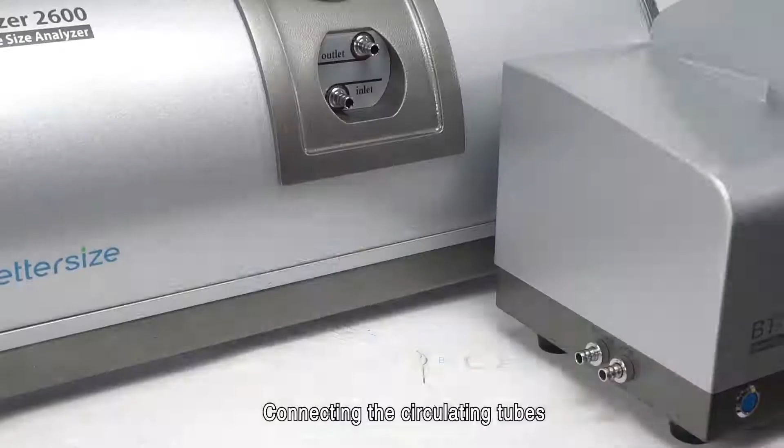Connecting the circulating tubes. Take two circulating tubes, one connects from the water inlet port on the front of the instrument to the water outlet port on the left side of the BT802. The other tube connects from the water outlet port on the front of the instrument to the return water port on the left side of the BT802. Both tubes must be connected firmly.

Connecting the inlet and outlet tubes. Take a big drain tube and insert one end to the drain port on the right side of the BT802. Cut appropriate length, and place the other end in an empty bucket. The recommended length is that the tube end is right above the bucket.

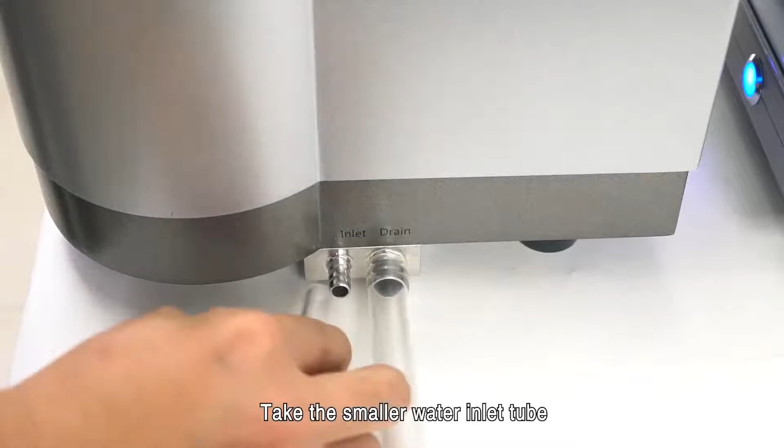Take the smaller water inlet tube. Insert one end to the water inlet on the right side of the BT802. Cut appropriate length. Insert the anti-blocking nozzle on the other end, and place it in a bucket with water inside. The appropriate length of the water inlet tube is about 5 cm from the bottom of the bucket.

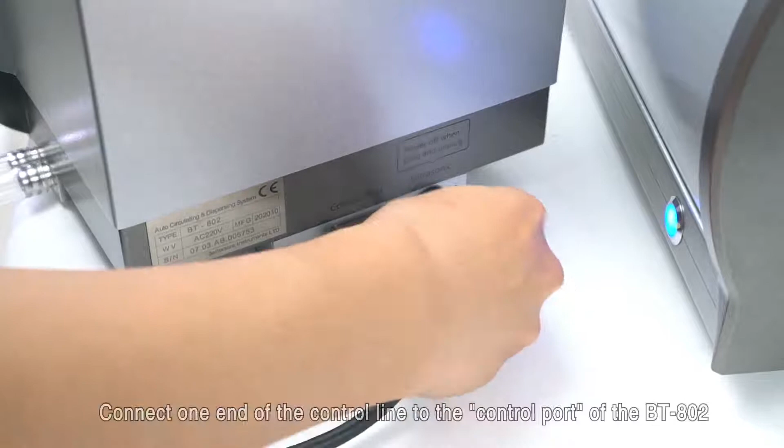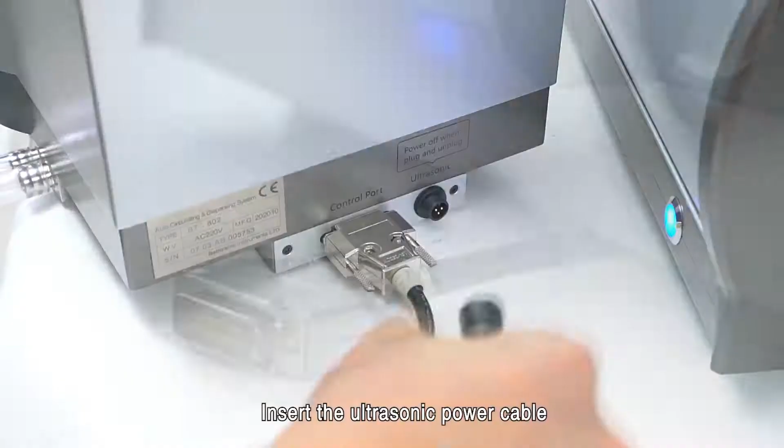Connecting the circulating system control line and power cable. Connect one end of the control line to the control port of the BT802. Tighten the screw and pass the other end from the bottom of the main device to the back side. Insert the ultrasonic power cable into the ultrasonic power port on the back of the BT802, and place the BT802 on the right front of the main device.

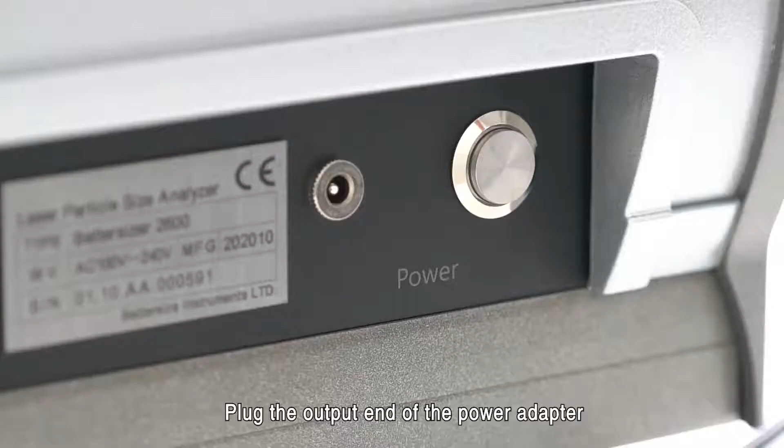Connecting cables. Connect the control line passing through the bottom of the main device, and tighten the screws. Plug the output end of the power adapter into the power connector of the main device. Plug one end of the USB cable into the signal port. Plug the other end into the USB port of the computer. Connect the adapter power cable.

Plug the power cable of the instrument and BT802 into the power socket, and turn on the power. Power on. Press on the power switch to turn on the particle size analyzer, and press on power switches to turn on the computer and the monitor.

Installing operating software. First insert the USB flash drive into the USB port of the computer. Then open the USB flash drive by double-clicking it. Open the folder Bettersizer Laser Particle Analyzer System. Double-click Setup.exe to start the installation, and follow the instructions to finish the installation of the software.

Installing the USB driver. Right-click Computer, select Manage, and then Device Manager to find STM32 Virtual COM port. Right-click Update Driver. Select Browse My Computer for drivers. Then head back to the USB flash drive, and select the file named High-Speed Driver 1.1, and click OK to complete the installation of the driver.

Testing and viewing system status. Checking the hardware function of the instrument. Start the software, and click the Supply, Drainage, Rotating Speed, U-sonic, R Speed plus and R Speed minus buttons to check whether they are working properly.

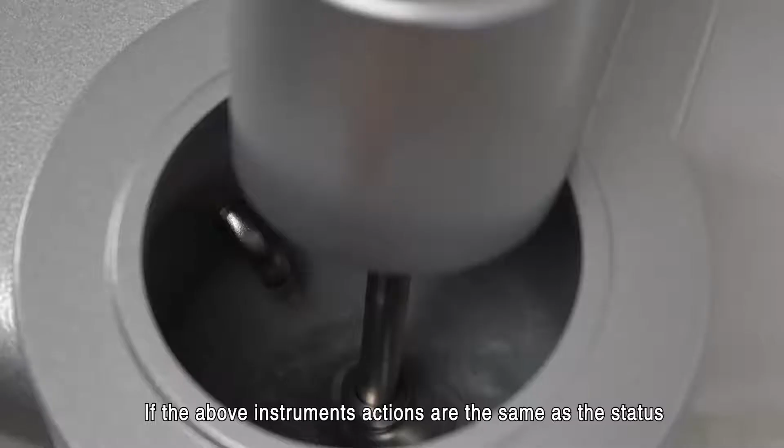If the above instrument's actions are the same as the status shown in the video, it means that the hardware system of the instrument works as normal. Follow the process for other dispersion units.

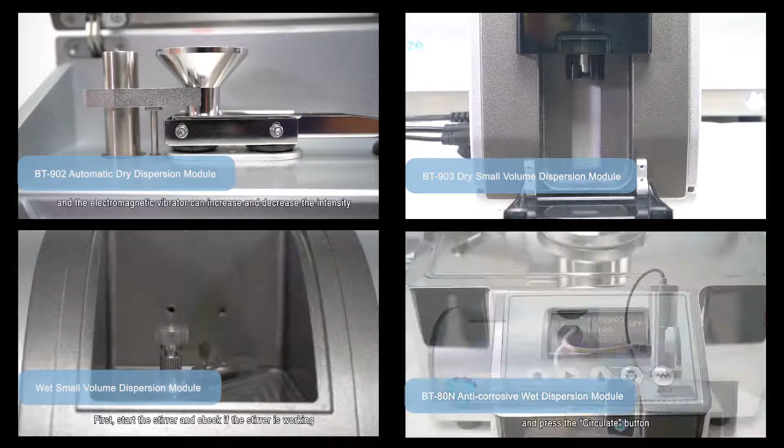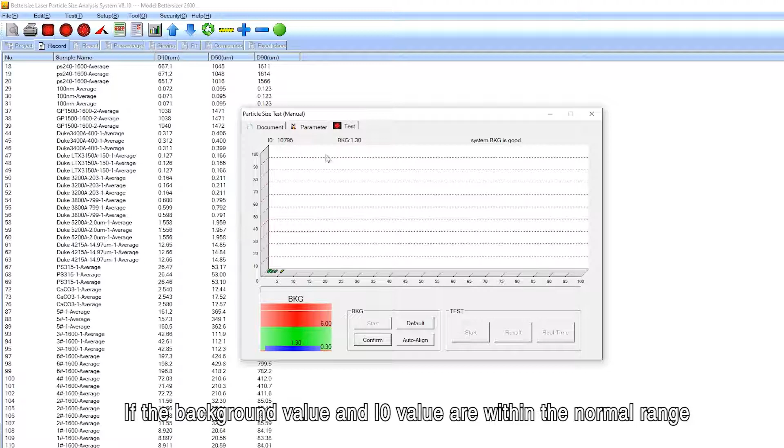The I0 value is usually between 10,000 to 30,000. If the background value and I0 value are within the normal range, it indicates that the instrument is in good condition. Routine test steps. Select or create a new project.

Click the Particle Size Test Manual button. Fill in each blank in the document pop-up window, and click Parameter to set relevant parameters. Click Test again to enter the test window. Click the Supply icon to supply water.

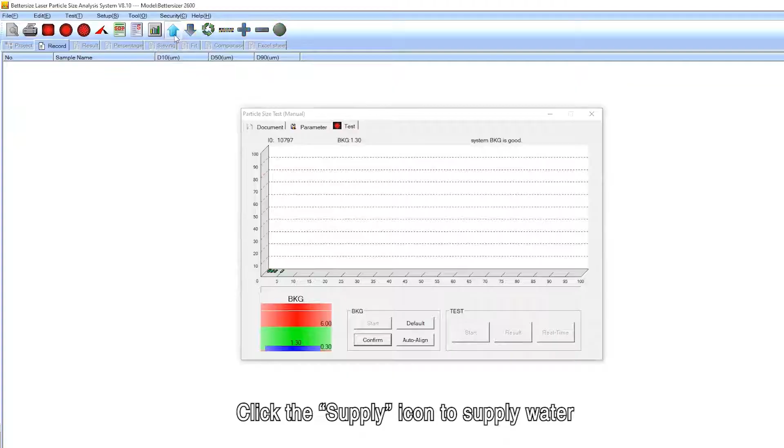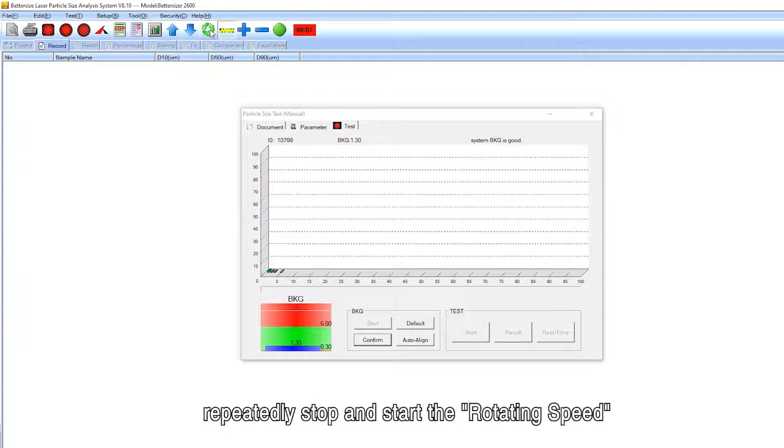Add dispersant, and then click the rotating speed and ultrasonic icons to remove air bubbles. The bubble removing method is: repeatedly stop and start the rotating speed, each time interval of 2 to 3 seconds. Repeat 2 to 3 times. And click the confirm button to test the background.

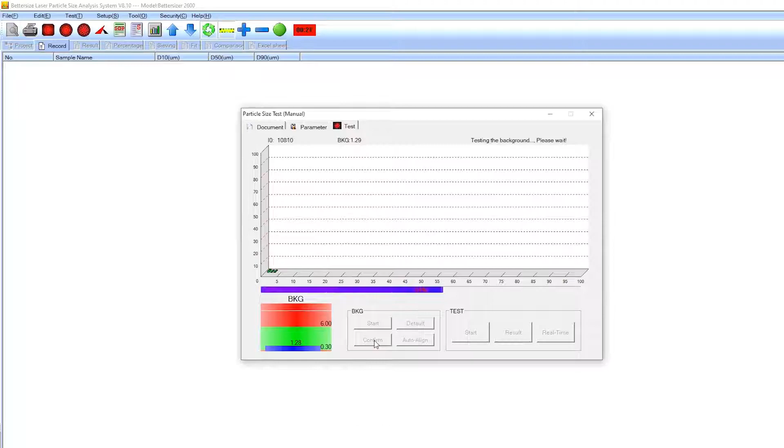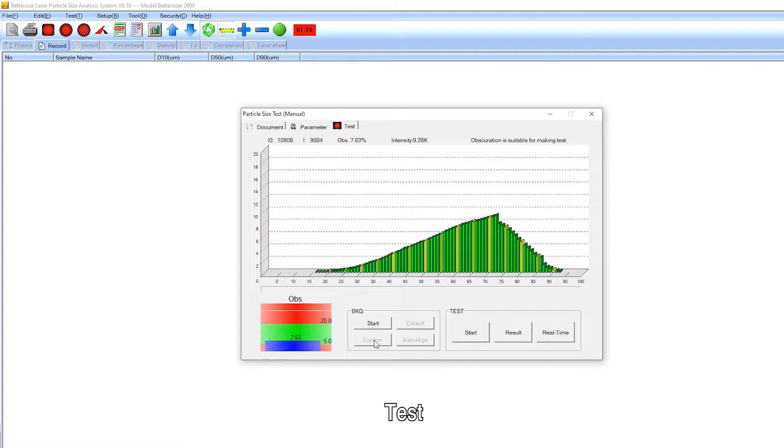Sampling and adding samples. Mix samples well. Add a small amount each time, and add multiple times. Stop adding samples until the obscuration OBS is between 10% to 15%. Test. The dispersion time is 1 to 3 minutes for general sample.

During the dispersion, you can click the real-time button in the test area to see whether the test results are stable. If the test results are unstable, continue the dispersion until the results become stable. Then the test data is valid.

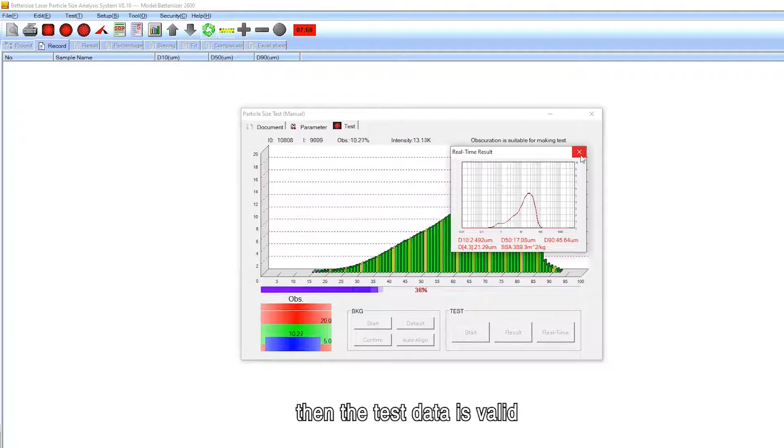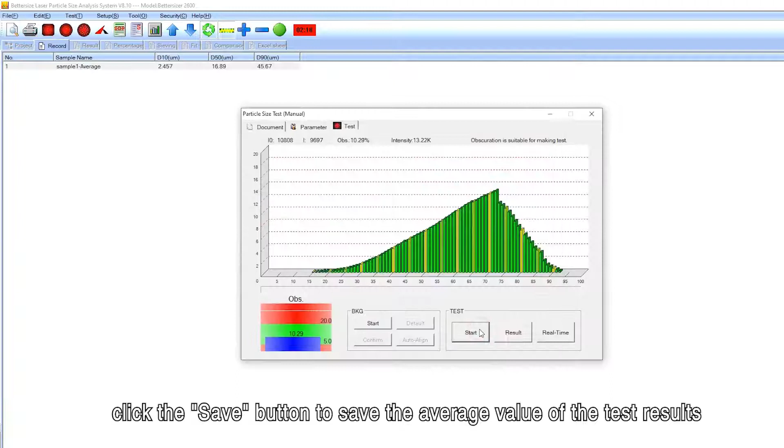Click the Start button in the test area. Then you can select the average value. Click the Save button to save the average value of the test results. And the test ends. It usually tests 2 to 3 times to check the repeatability.

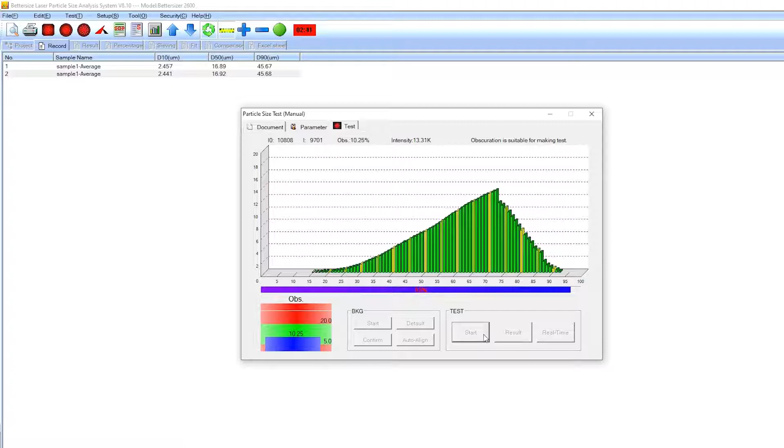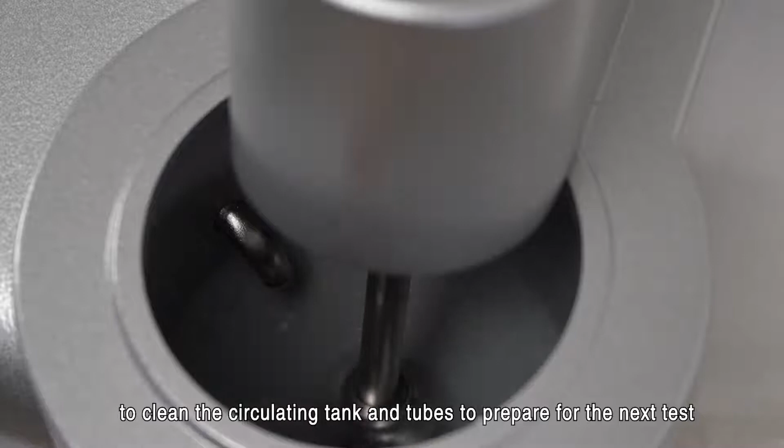Clean. After the test is completed, click the Auto Cleaning button. Clean the circulating tank and tubes to prepare for the next test. Automatic testing. Automatic test is a mode in which the system works according to a preset SOP.

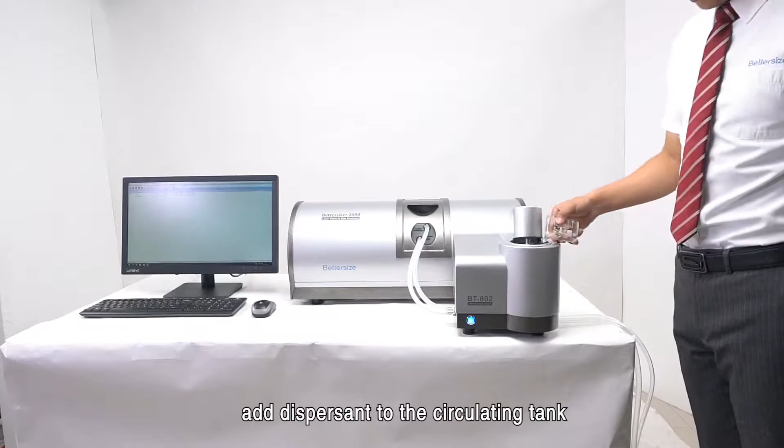Click the Particle Size Test Automatic button. Enter the sample information in the document. Then set or select SOP. And open the Test tab to enter the test window. Add dispersant to the circulating tank, and click the Start button.

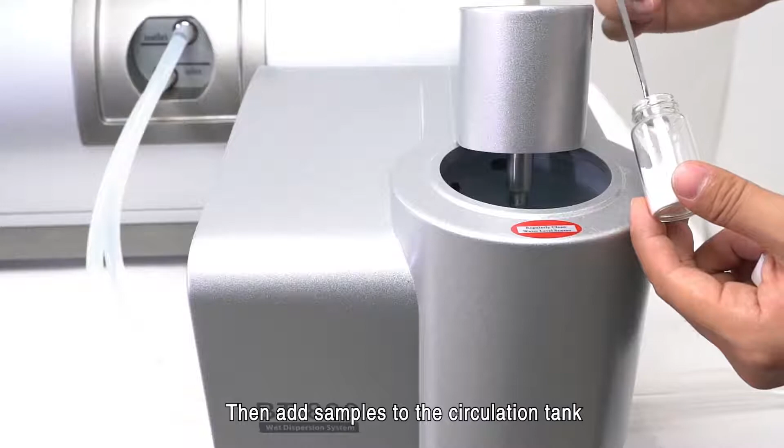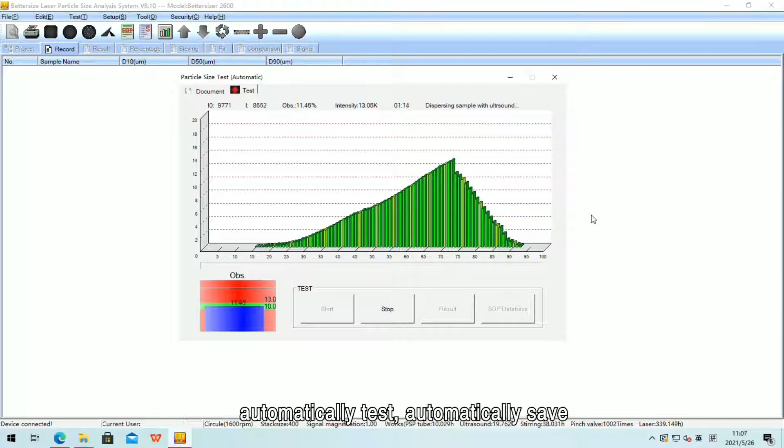The system will automatically supply water, remove bubbles, and measure background. Then add samples to the circulation tank. The system will automatically disperse. Automatically test. Automatically save. And automatically clean.

Introduction of frequently used software functions. 1. On the record page, right-click to save the current results in other databases. And you can also perform other operations such as reanalysis or printing the current results. 2. On the result page, right-click to copy, convert current result page to PDF or export to Excel.

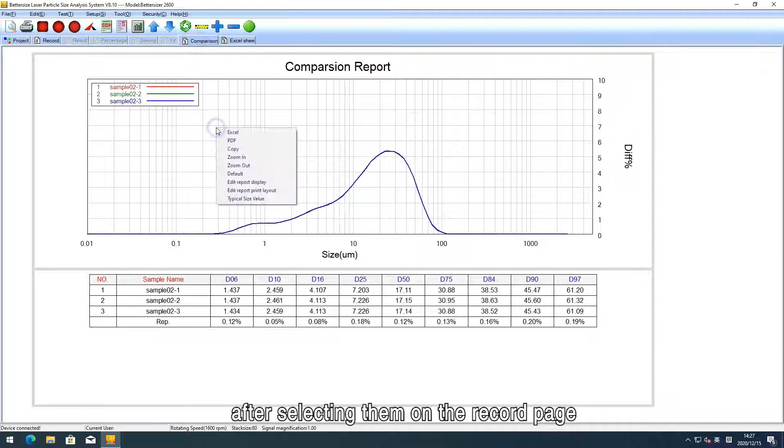3. Click the comparison page to compare multiple results after selecting them on the record page. You can also copy or export the comparison results to Excel by right-clicking the comparison page.

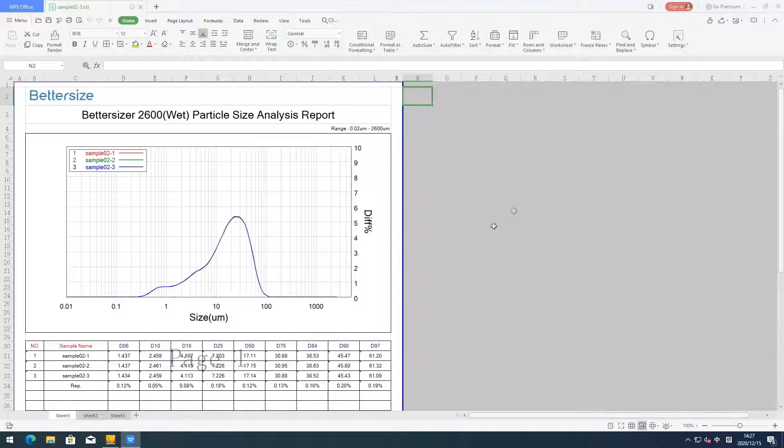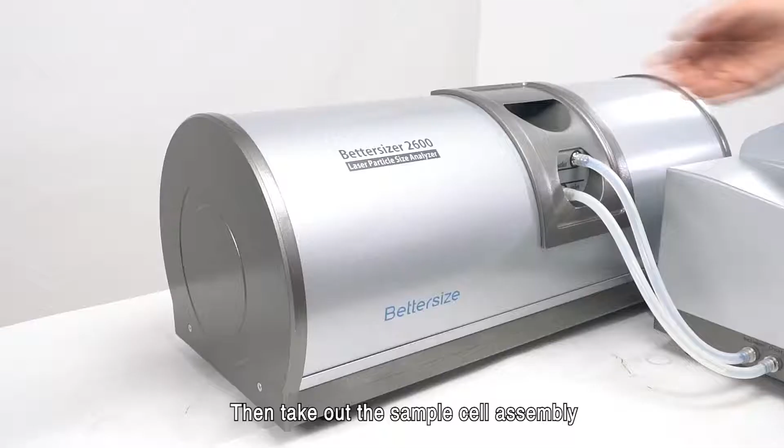Daily care and maintenance. Cleaning the sample cell. After a period of use, the sample cell will be stained and needs to be cleaned regularly. It is very important to first click the drainage button to drain the water in the circulation tank. Then take out the sample cell assembly from the instrument and place it on the work table. Use an M3 Allen key to remove the 2 screws and take out the sample cell.

Wet the sample cell brush with a drop of detergent by the sink. Hold the side of the sample cell. Brush the inside and outside of the sample cell. Then rinse the sample cell with clean water. Dry the outer surface of the sample cell with a tissue.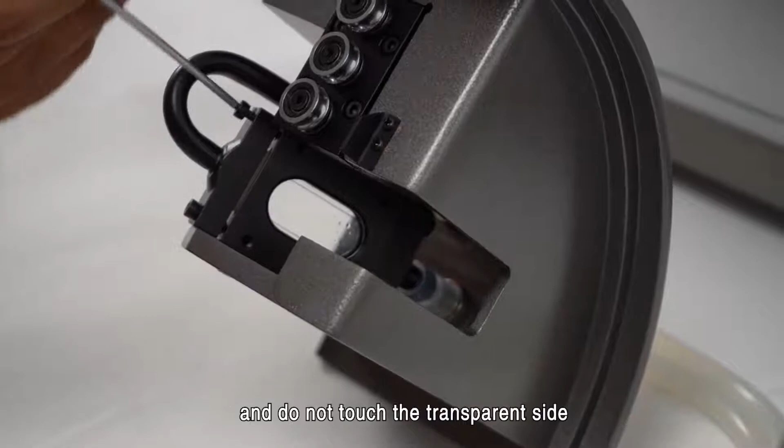And use the rubber bulb to blow off the paper residue that may be attached to the outer surface of the sample cell. Hold the side of the clean sample cell. Place the sample cell in the accessories and tighten the screws. Pay attention to the correct position of the seal ring, and do not touch the transparent side. Click the supply and rotating speed buttons to check whether the sample cell is leaking. Finally, put the sample cell window unit back into the main device.

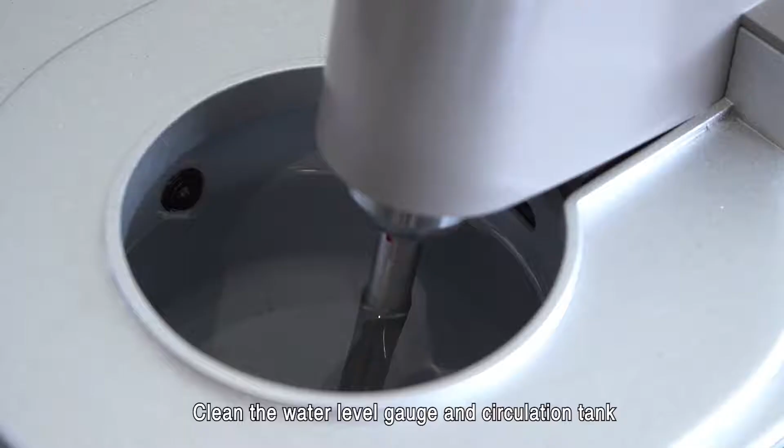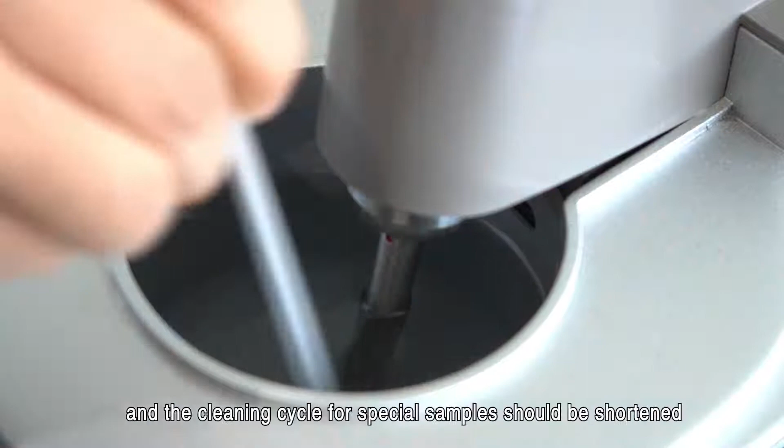Clean the water level gauge and circulation tank. The stain of the water level gauge will result in the inability to automatically supply water, and the stain of the circulation tank wall will affect the test results. Therefore, the water level gauge and the sidewall of the circulation tank must be cleaned frequently, usually once a month, and the cleaning cycle for special samples should be shortened.

Use a sponge brush to avoid scratching the surface of the water level gauge when cleaning it. The circulation system needs to be stopped when cleaning the sidewall of the circulation tank. After cleaning, click the auto cleaning button in the software to rinse the water level gauge and the circulation tank.